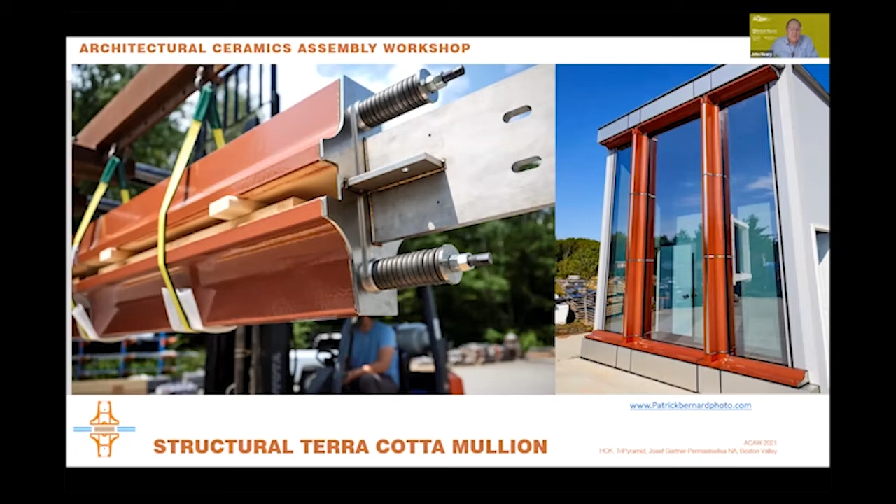Our team includes members of HOK Facades, Structural Engineering, and Architecture, TriPyramid Structures, designers and mechanics, and Gartner Permasteelisa, managers, engineers, and fabricators, all working with the Boston Valley team. Credited photography and video were created by Patrick and Marzena Bernard.

Terra cotta is most familiar in contemporary facades as rain screen cladding, plank and baguette, some cast shapes. There is growing evidence of interest in the sculptural qualities, including color of terra cotta as an alternative to the ubiquitous glass grid, as a handful of recent facades such as SOM's 28 and 7, which I wasn't aware of when we started this project, illustrate.

Our first concept was to create a kind of truss with terra cotta in compression and stainless steel chords providing tension to resist bending force imposed by wind. So that's what these are.

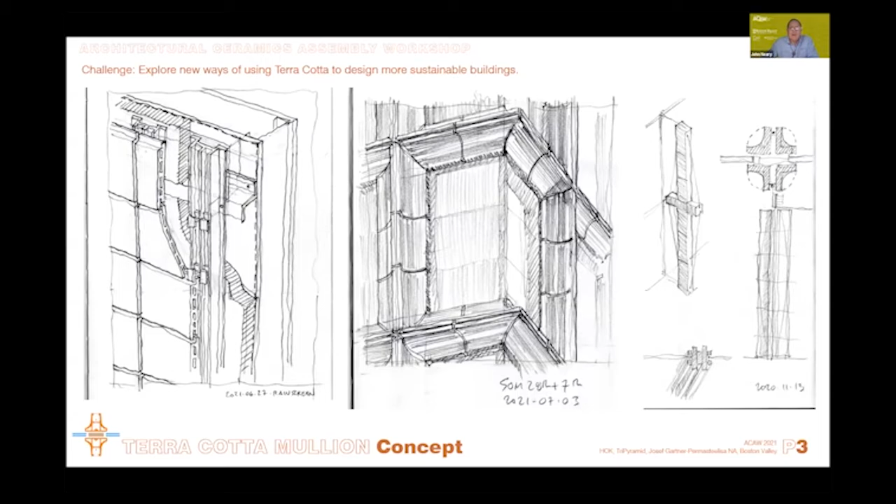Thinking of this as rethinking the mullion led to considering the earliest examples, such as Reims cathedral from around 1230 AD. It is a structural element resisting bending under wind pressure by its mass and its depth. We wanted to capture its sculptural quality in a terra cotta mullion that spans the boundary between inside and outside.

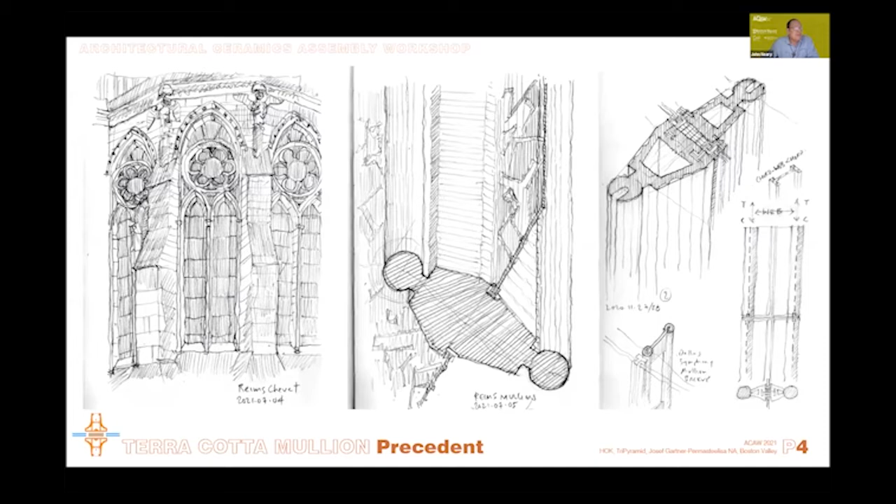Traditional pre-modernist terra cotta facades were representations of stone architecture in less expensive materials. The Woolworth building's explicitly Gothic style included carved terra cotta sculpture that mimicked stone ornament. This cladding was wired and clamped and pinned to structural backup steel. It created the illusion of structural surface.

On Sullivan's buildings, the plastic essence of clay became a medium for the animating force of imagination, represented by organic patterns based on the dynamic growth of plants and the structural expression of classical and Gothic architecture. It was an abstract expression of structure.

With its plastic ability to achieve intricate molding and carving, as in Sullivan's ornament, terra cotta has been used to create surfaces of a richness never matched except in carved stone or cast bronze. With its similarity to brick, we expected terra cotta would have significant structural capacity in compression.

Combining terra cotta in compression with pre-stressing steel tension reinforcing was done by Eladio Dieste in his famous projects in the 1970s, where tile forms the surface of thin pre-stressed shells. The principle is similar to reinforced concrete, especially thin ferrocement as used by Peter Rice for the sunshades at the Menil Collection. But casting is a different set of processes from the assembly that we envisioned.

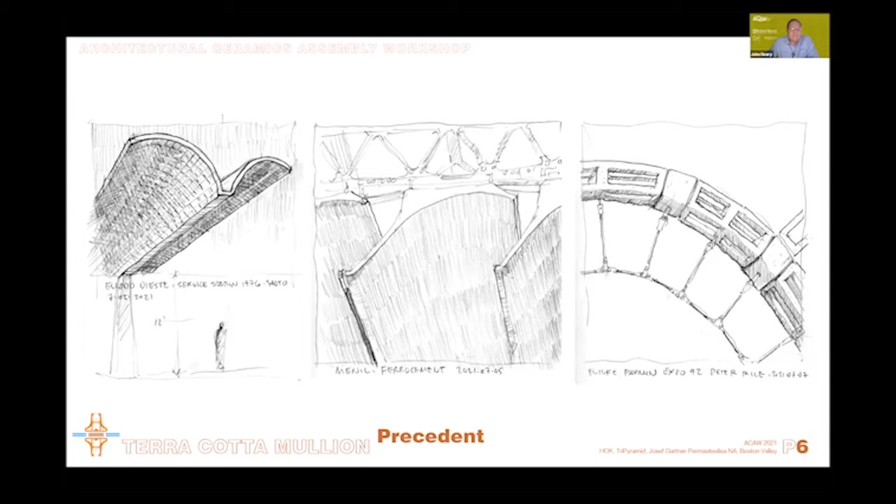After Boston Valley agreed to the idea for our project, we asked Michael Mulhern and Jeff Anderson of TriPyramid if they would join in the design effort to test the idea. Their work as the premier designers and manufacturers of structural facade components began with the tension structure at the Louvre Pyramid, which I also worked on.

The first step was to have chief engineer Nate White analyze the forces in a hypothetical mullion of 20-foot span and 5 to 10-foot spacing. We assumed a single length of terracotta and a wind load of 30 pounds per square foot.

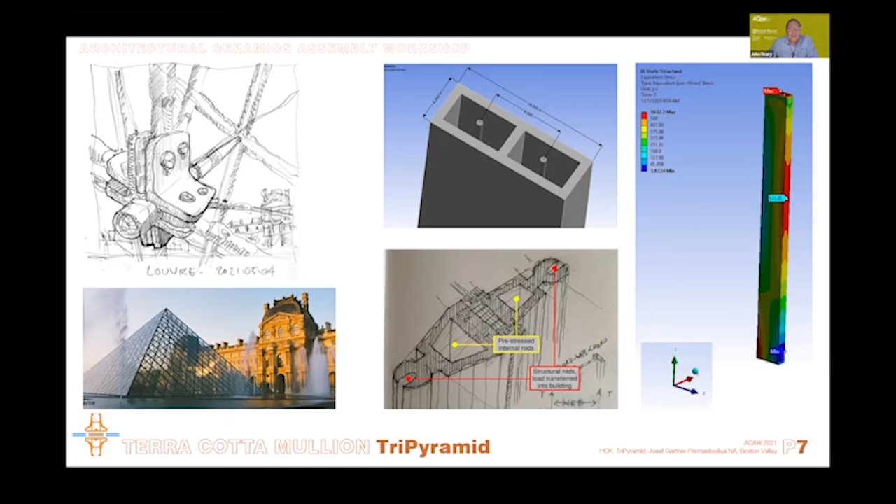Boston Valley asked Professor William Carty at Alfred University to help us with testing information on the material, and he provided tensile strength of 4,300 psi and a compressive strength of 11,660 psi, similar to high-quality concrete. Project manager Matt Bull began modeling some versions of the mullion.

An initial concept with two sets of pre-stressing rods, one inner and one outer, was simplified with the introduction of structural stainless steel plates, shown here at the base and the top, at the joints between the sections of terracotta, which are limited to 5-foot lengths by current production capabilities.

In the event of one rod or one half of the terracotta failing, load would be transferred to the other half. Access to the rods and the fittings is provided by a stainless steel cover, which protects and expresses the tension element. The next step was to test the material under pre-stress load to see how it would act in the event of an impact. We were afraid that it might explode.

Impact loads were applied to test samples under a range of pre-stress forces by crouching behind the plexiglass storm door and swinging the steel rod over to whack the terracotta. I believe that Matt was standing about 30 feet away since he forgot to operate the camera on the tripod, while intern Dylan Schwally was delegated to swing the rod.

The results were encouraging as the material seemed to almost self-heal when cracking occurred, though pieces did fall off the surface. Nate White declared it tough as nails, and no interns were harmed in the testing of this concept.

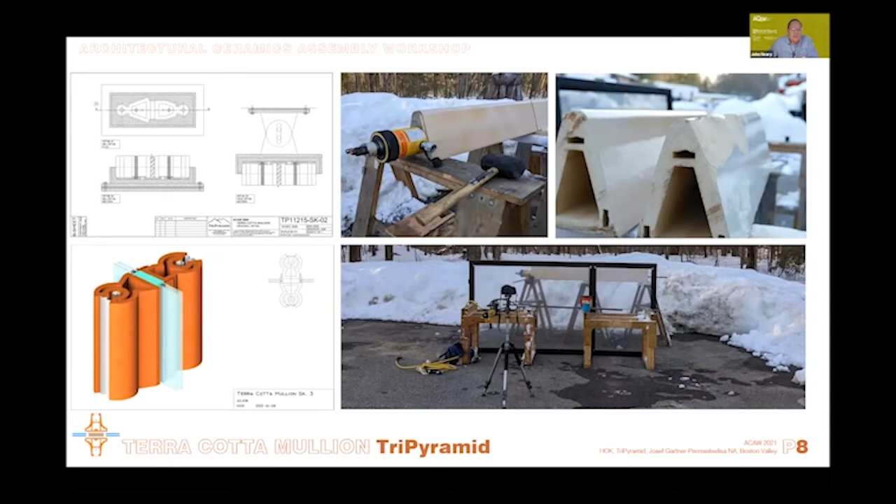While discussion with TriPyramid was going on, we were working with Boston Valley studying the shape of the mullion and how the structural vertical would connect with the rain screen infill transom pieces at the sill and the head. Victoria Araskina did iterative modeling studies exploring the shape of the mullion and the cast bosses at the corners. We tried to unite those with the verticals visually while avoiding the reading of a static frame.

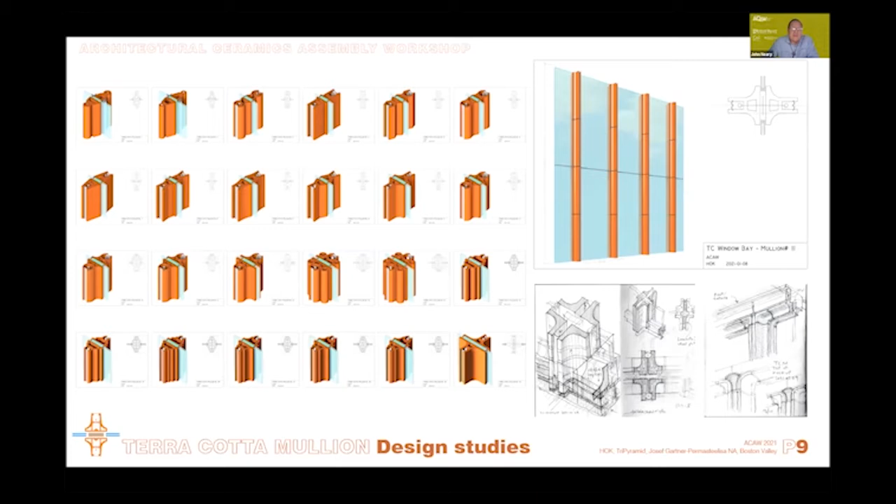We asked Roberto Bicchiarelli, North American lead concept designer of Gartner Permasteelisa, to help conceive how the parts would be assembled as a facade that would meet high performance criteria for thermal resistance, air and water infiltration, and movement. He brought with him Bernhard Rudolph, head of engineering of Gartner, Germany, who did initial sketches of glazing frames supported on the plates at the joints in the mullion.

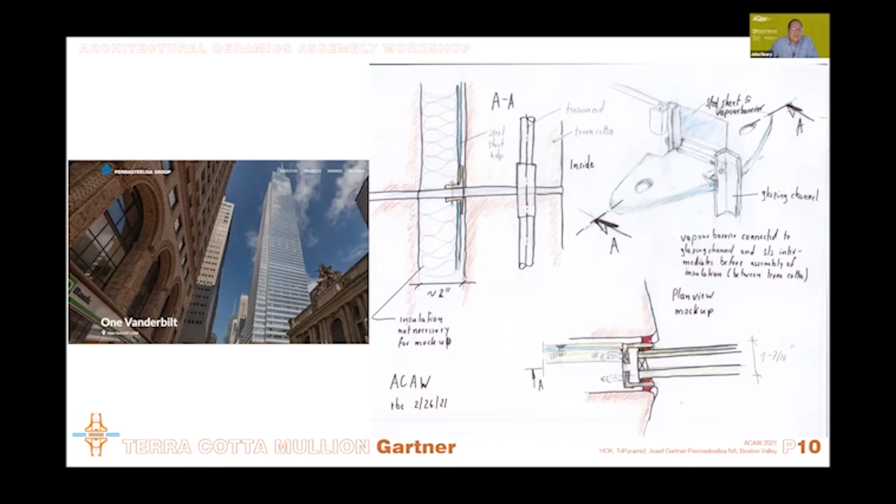Gartner and Permasteelisa have extensive experience with terracotta, as on the recent One Vanderbilt Tower with material from Boston Valley. Roberto agreed to have Permasteelisa construct a visual mock-up which would demonstrate the technical feasibility and the aesthetics of the concept. Boston Valley pre-construction manager Andrew Prius developed the terracotta profiles to make the pieces conform to requirements for extruding, casting, and assembly. BV and TriPyramid collaborated on analysis of the shapes for strength and stability.

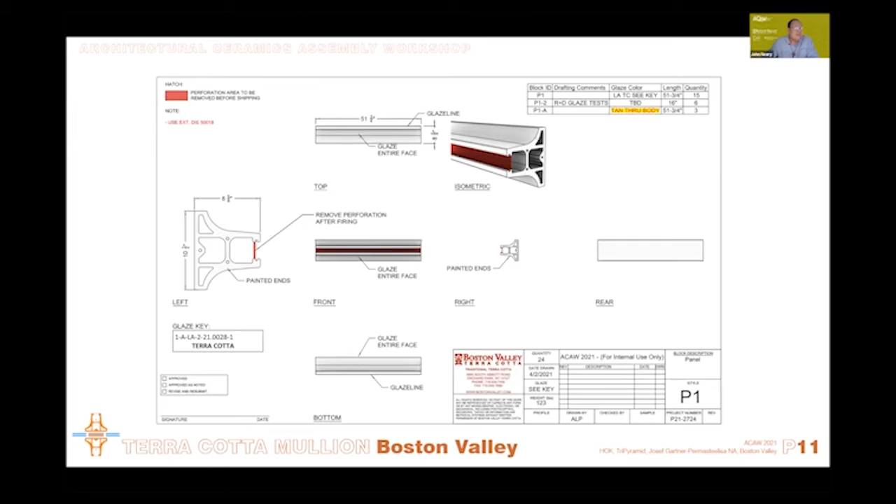Initially, we had imagined the terracotta mullion with a natural burnt sienna color, but wanted to incorporate the beauty of glaze as well. The terracotta color glaze combines the two. We had thought about exposing the tan base as resembling the French limestone of the original inspiration at Reims, but without the fossils in their texture, we decided against that. As a result of the imponderables of different kilns at BV and in Kansas City, where Andy Brayman made the original samples in the glaze, the final color has a subtle violet hue.

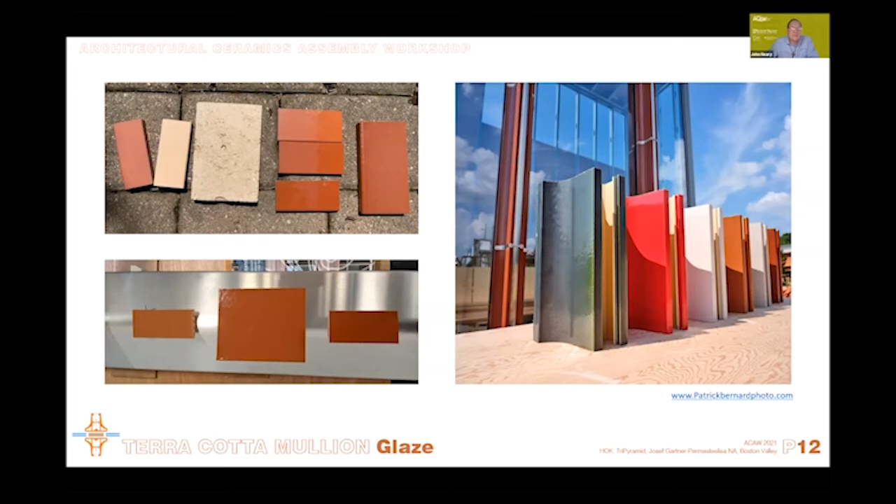BV made a range of samples to see the shape of the mullion with different colors, including the faux granite found on older buildings, including Woolworth, so we could test the reading of the profile. TriPyramid developed assembly drawings for the mullion based on a process for pre-stressing the continuous high-strength stainless steel rods that hold the sections of terracotta together.

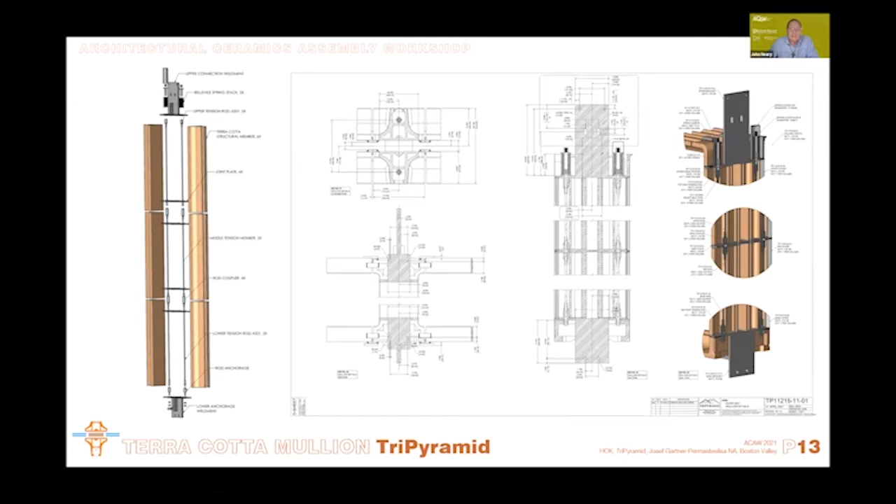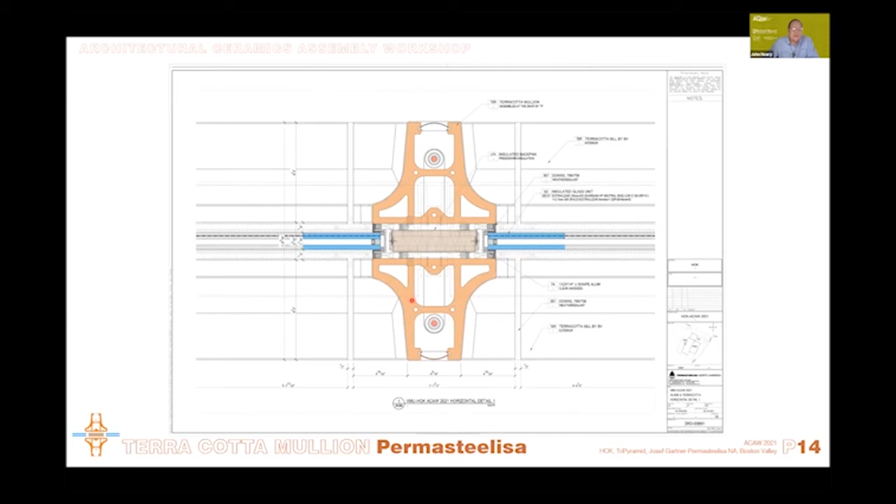Springs at the top of the rods maintain the compression force against thermal expansion or deflection, which is severely limited to L over 5,000. The rods pass through the plates, which spread the force evenly through the clay sections, and are connected with couplings at each joint to allow for replacement of damaged sections of terracotta in theory. Permasteelisa engineers and fabrication experts did the structural calculations and shop drawings for the mock-up. You can see here the insulation that we located between the two halves, interior and exterior.

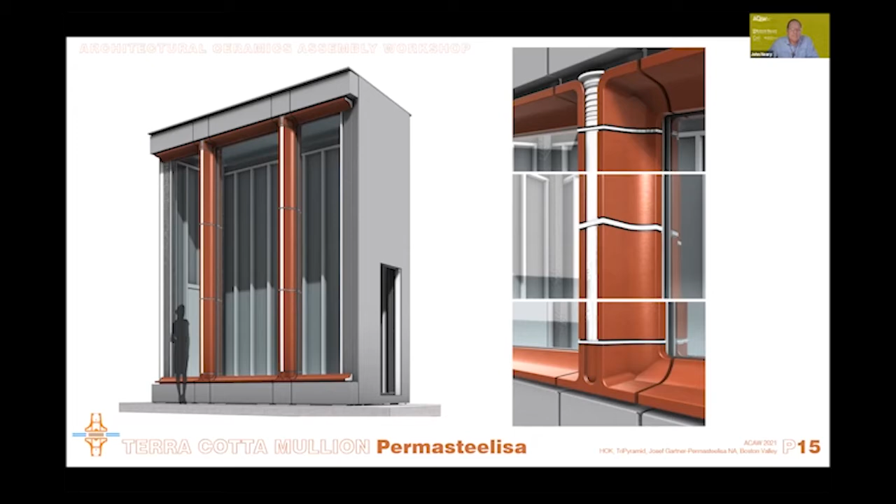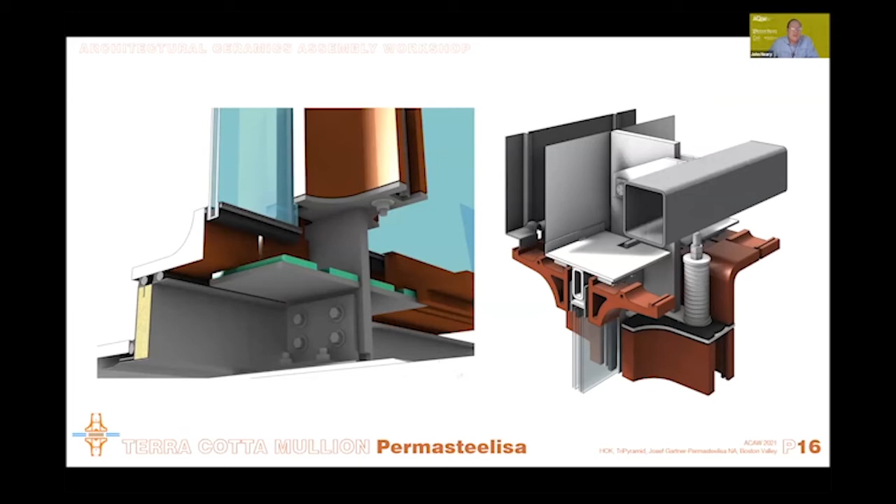They modeled the mock-up assembly, including all the terracotta clips, support angles, fasteners, flashings, and the viewing enclosure. It was an object lesson in the expertise of the fabricators to see our complicated modeling of the anchorage connections and flashings simplified to what is built. You will see photographs of the mock-up in a moment.

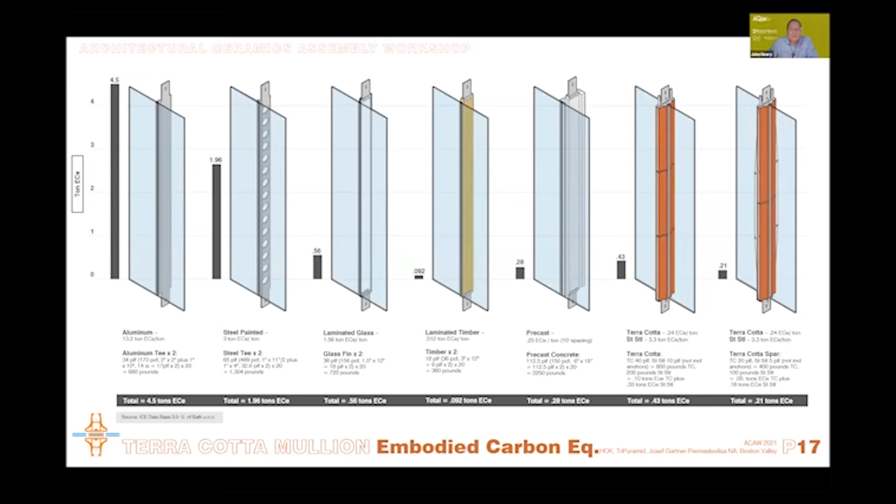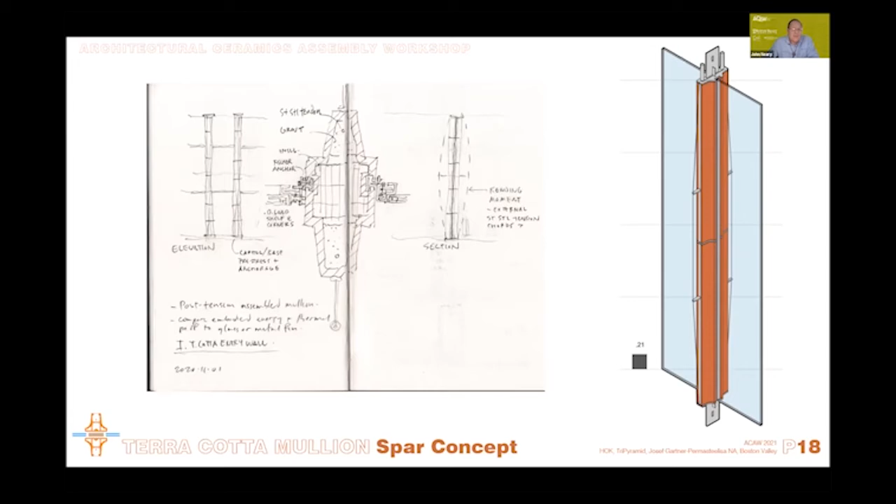The spar concept with exposed exoskeletal tension cords was our initial thought for combining a pre-stressing tension component with compression member terracotta, and was the real impetus originally for asking TriPyramid if they would help. This kind of arrangement would afford the greatest reduction in overall weight, but it would be more difficult to build.

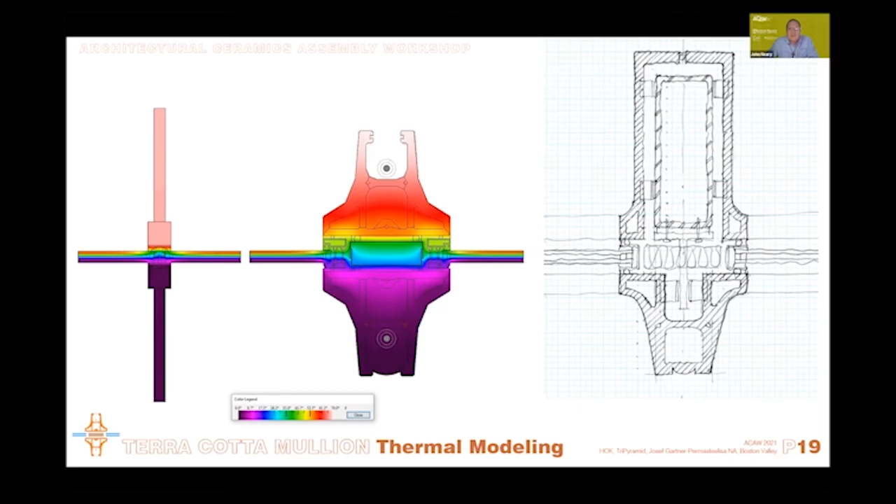The terracotta mullion is designed as two separate redundant pillars, each with a stainless steel tension rod internally, which is this, and with a thermal separation between the outside and inside, connected by stainless steel plates at the joints, which are low conductivity elements, roughly 15 times less conductive than aluminum. To achieve the same kind of expression of depth on the exterior of the glass without thermal bridging, an aluminum fin would need its structural cross-section entirely inside the glazing line, and any exterior material would be entirely decorative, adding to the embodied carbon total.

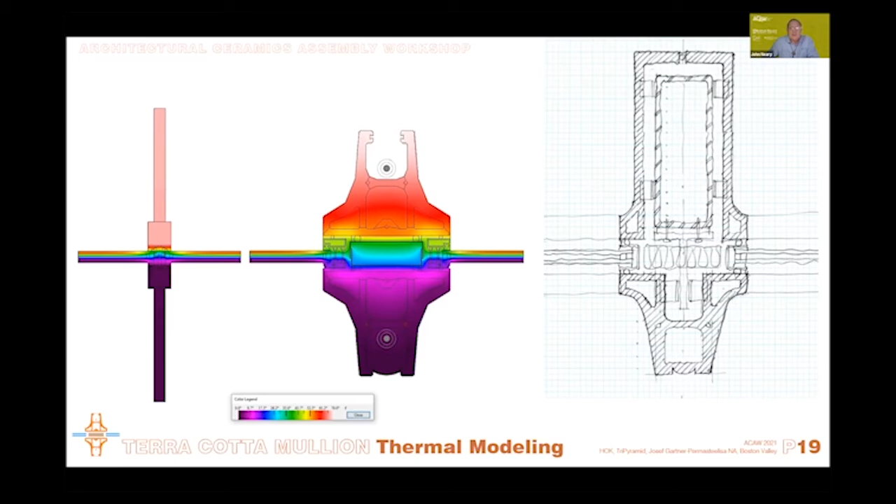To achieve the expression on the exterior with a conventional assembly clad with terracotta, not pre-stressed, would require a steel member such as an HSS on the interior to take the wind and dead load of the glass, with the exterior profile supported on brackets, resulting in significantly larger cross-section than the pre-stressed assembly and more material overall. We imagined the concept for the prototype extending to a unitized curtain wall system that would have the aesthetic qualities and potential embodied energy benefits of the mullion.

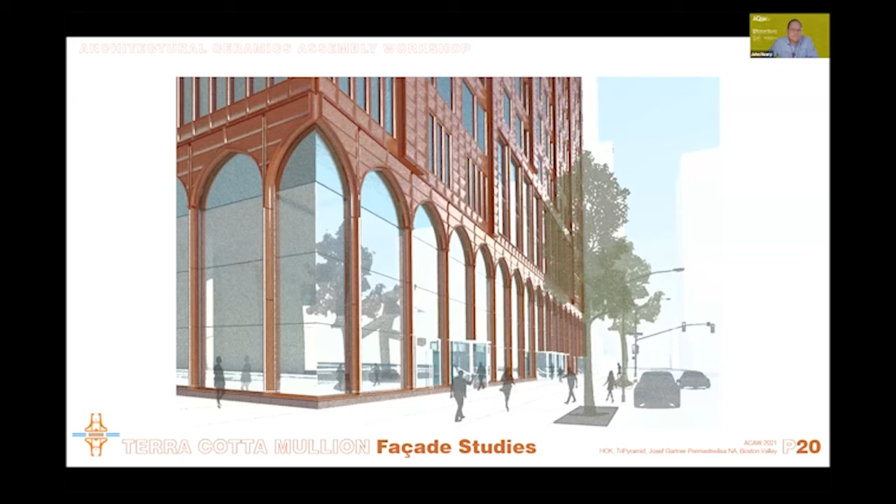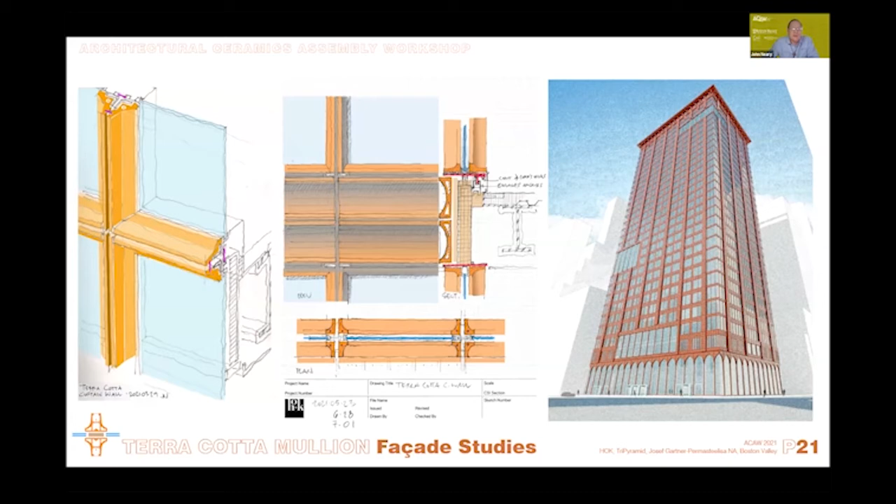We learned recently that Sullivan's Buffalo Guaranty building originally had a kind of kinetic facade with awnings that tenants apparently operated in groups, creating a large-scale pattern similar in spirit to our sketch for the Terra Cotta curtain wall, which could be less or more decorative as desired.

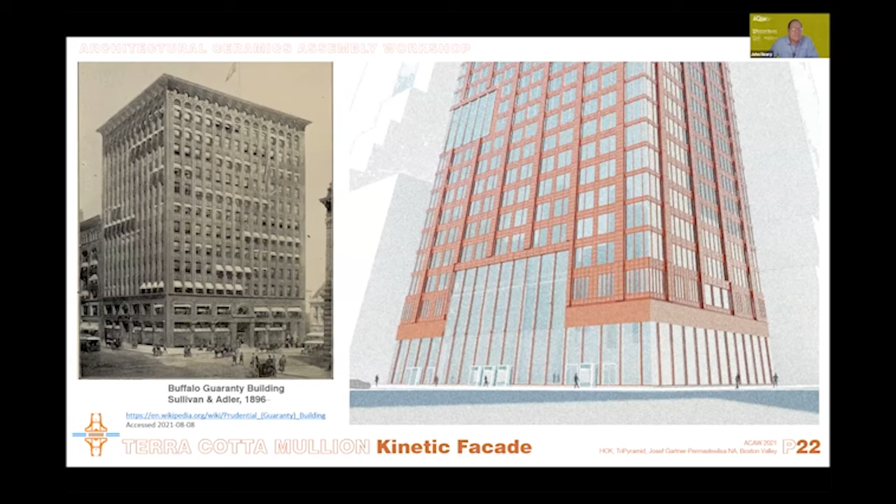This is an abbreviated look at the fabrication of our mock-up, where the concept is tested for constructability and how it really looks and feels. At Boston Valley, special tools and machines combine with handcraft in creating the Terra Cotta pieces. We talked about the idea of wabi-sabi, the intentional incorporation of imperfection in the modeling of the boss elements, which had complicated geometry. This came up again when we saw that the new pieces have crazing in the glaze, which is only visible with dust on the surface when they're new.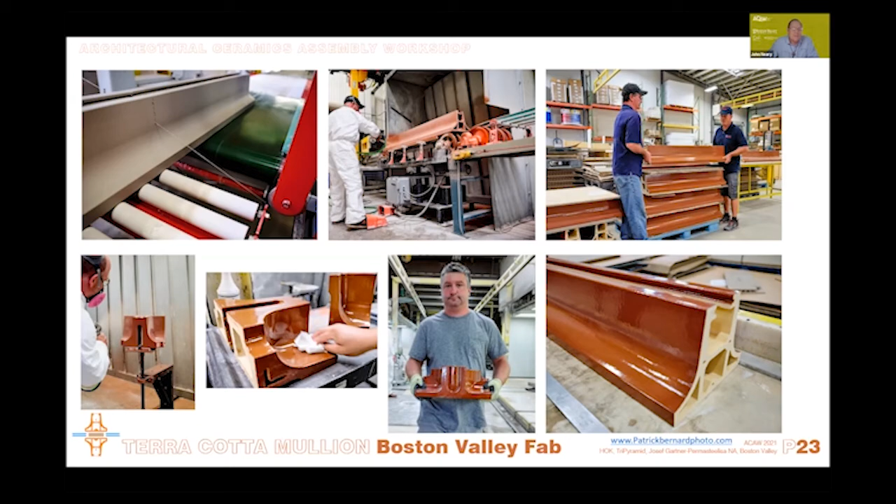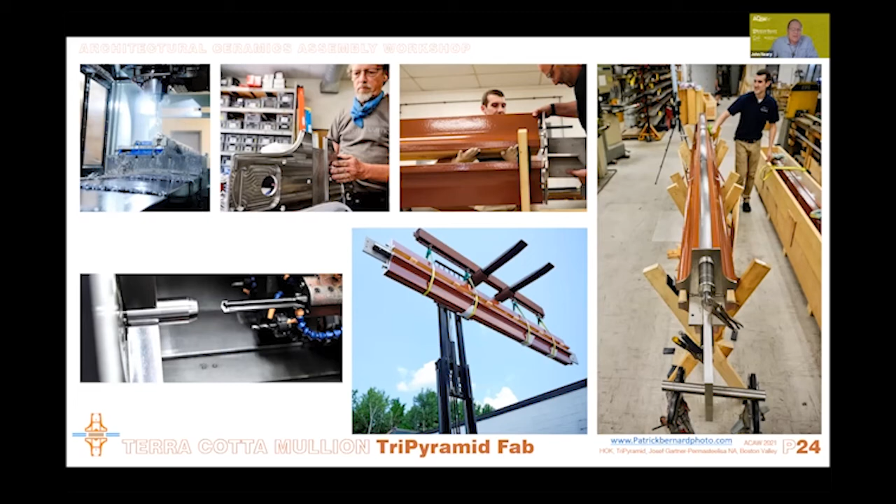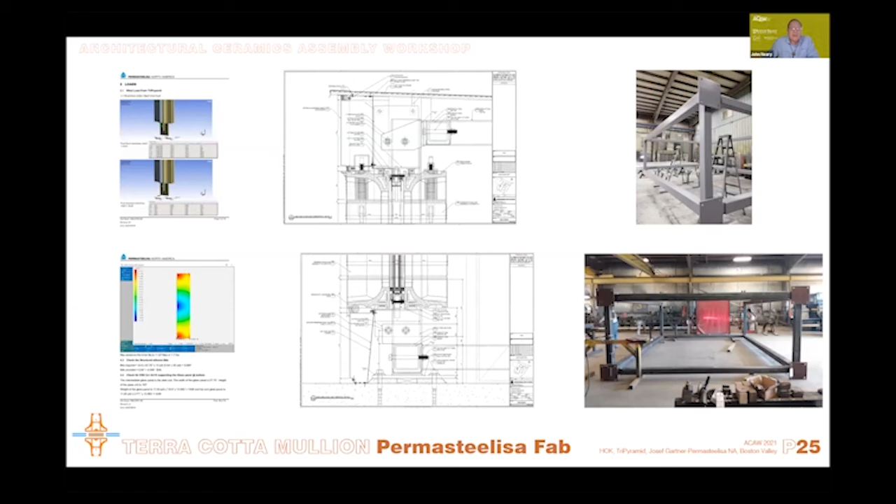At TriPyramid, the tension components are milled, tooled, and forged in stainless steel. As with the clay components, precise machine work is combined with skilled craft. Together, the stainless steel tension elements and the glazed Terra Cotta compression body of the mullions represent a synthesis, a machine and handmade. The armature for the actual facade assembly, including vision glazing, was fabricated by Permasteelisa subcontractors according to engineering and shop drawings by Permasteelisa engineers. Sealant compatibility, adhesion, and staining pre-testing was done by Dow Silicone.

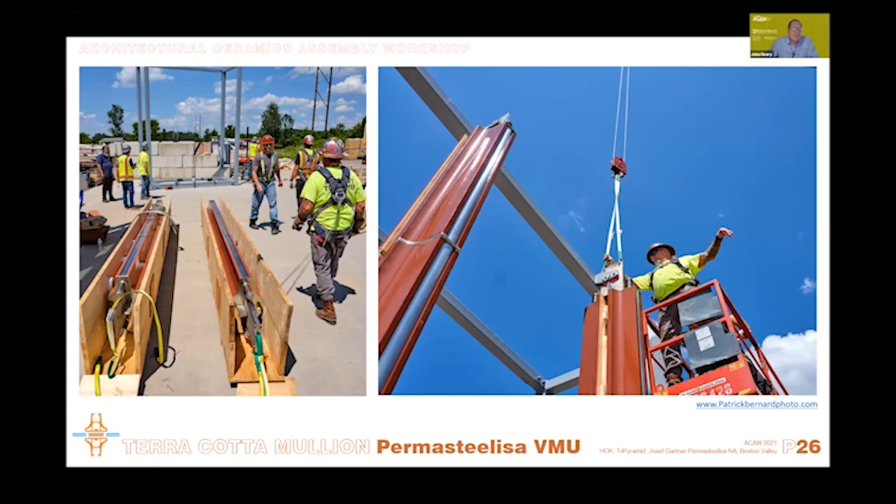Ironworkers from Local 580 in New York brought to Buffalo by Gartner and a team of carpenters guided by Permasteelisa fabrication managers Leo Flores and Khalil Ramani built the mock-up at Boston Valley's facility. The ironworkers erected the mullions and installed the glass in a few hours. This is Gus, the foreman. The mullions are sized in cross-section for spans and spacings twice what we have on the mock-up, but the effect of the proportions, the color, the combination of the terracotta and stainless and glass is visually successful even at this scale, in my opinion.

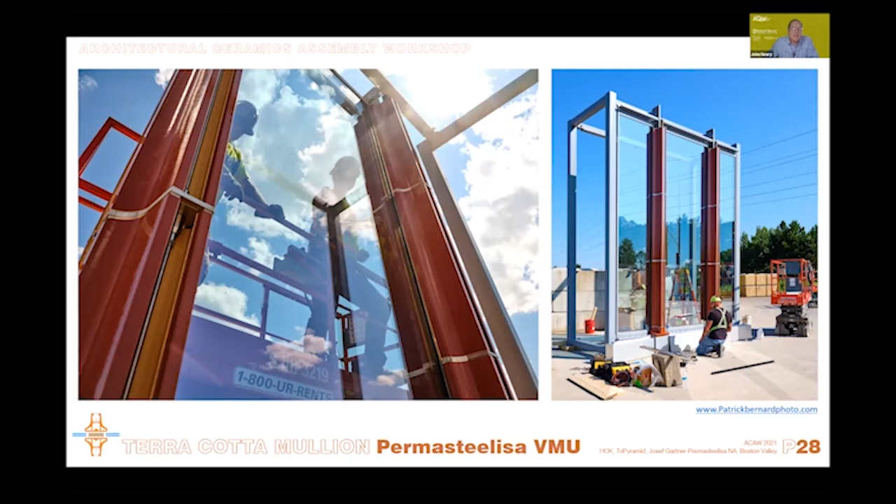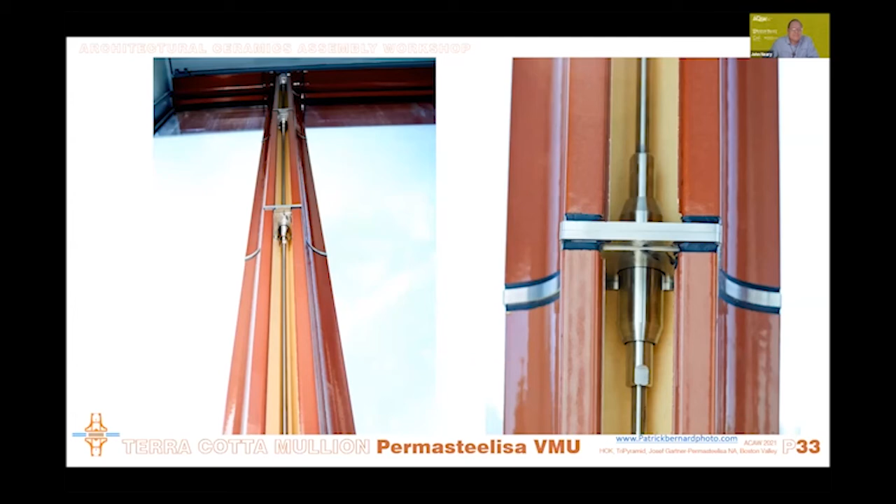The completed mock-up is photographed by Patrick Bernard. We left the cover off on the interior to make the tension elements visible. The design calls for epoxy between the stainless plates and the terracotta, which would be covered by sealant on the exterior, maybe on the interior. The tolerance on the plates is almost zero. The effect is a celebration of the joint, to use a famous phrase. The milled capital suggests the presence of the cup springs under the surface and also states our express interest in the aesthetic qualities of the overall assembly and the composition of the parts and the combination of materials and surface textures making up the whole.

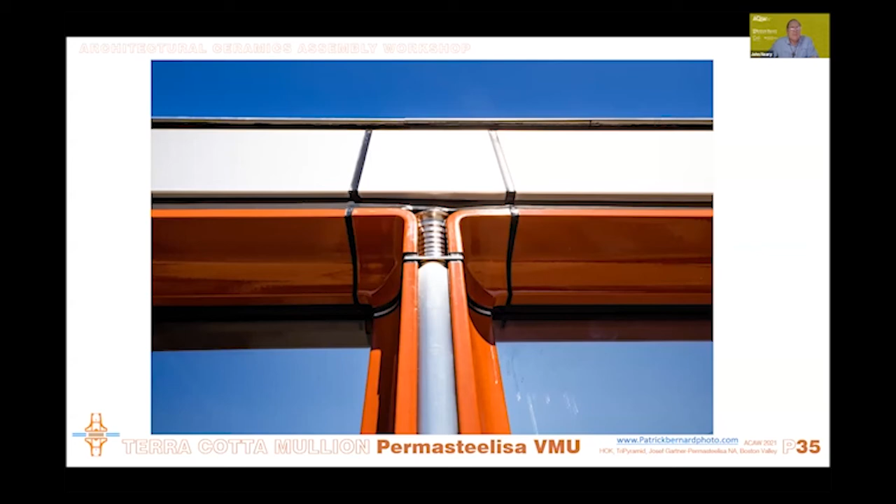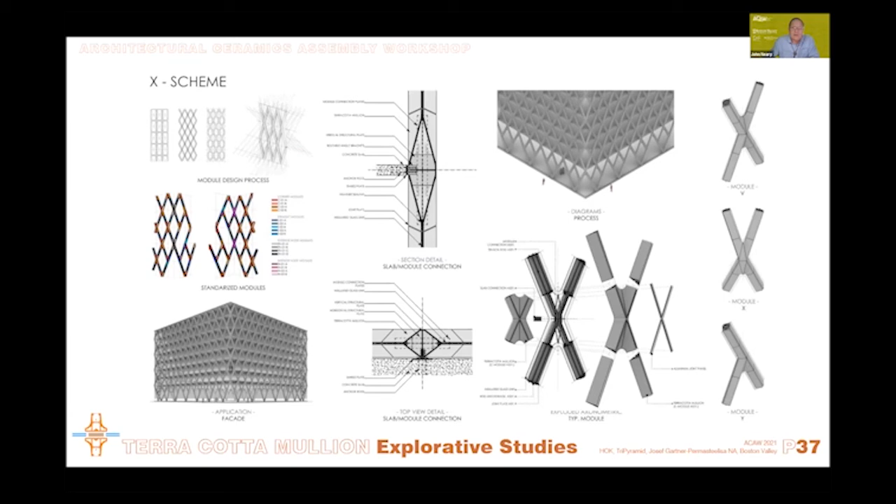A group at HOK investigated some ideas based on the terracotta mullion to see where it might lead, including this diagonal grid by Francesco Moreno, which would be made up of pre-stressed mullions and node connectors. We plan to pursue the terracotta mullion concepts further in the future.